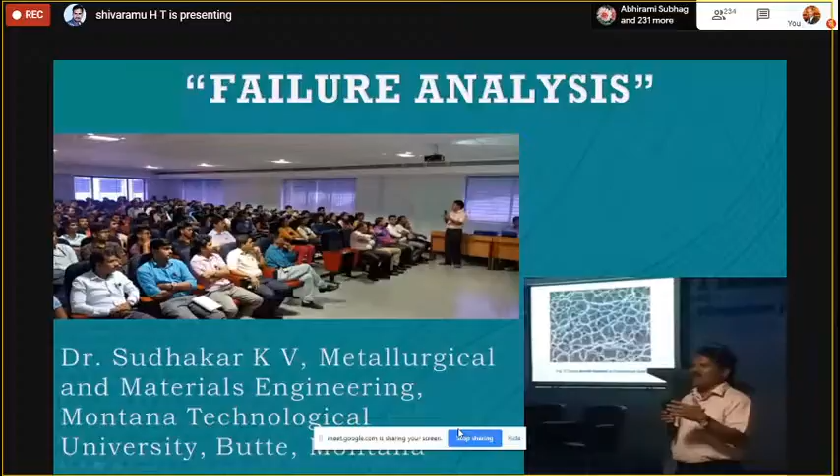Department of Mechanical Engineering organized technical talks for the benefit of students and faculty community. A technical talk on Industry 4.0 was organized on the 13th September 2019. Mr. Santosh MS, Senior Manager, Sales, IDAC India Private Limited was the resource person. On the 7th August 2019, a technical talk on failure analysis was organized. Dr. Sudhakar KV, Metallurgical and Materials Engineering, Montana Technological University, Montana was the resource person. On the 21st February 2020, a talk on use of modern tools in wire arc additive manufacturing was organized. Dr. Vijesh V, Associate Professor, Department of Mechanical Engineering, NMAMIT NITTE was the speaker.

A webinar on application of artificial intelligence to mechanical engineering and its allied engineering streams problems was delivered by Dr. Jai Bharti Simha, Chief Technical Officer, Director, Abiba Systems, Bangalore, India on the 8th July 2020. On the 25th June 2020, a webinar on semiconductors and their manufacturing process and usage in industry, an overview, was organized. Mr. Varun S. Gupta, Documentation Engineer, Akrite iTech Solution, Bangalore was the resource person.

Department of Mechanical Engineering organized career guidance talks for the benefit of students. A session on management of projects in a multidisciplinary environment was held on 20th August 2019. Our proud alumni, Mr. Vishal Vijay Kumar, Planning Engineer, Descon, ADNOC, Abu Dhabi was the resource person. On the 23rd September 2019, a talk on opportunities through GATE exam was organized. Mr. Anand Pai, Apex, Mangalore was the resource person. A talk on societal and environmental context and ethics of engineering practice was organized on 1st October 2019. Our distinguished alumni, Mr. Junaid Fiaz, Commission Engineer, Saudi Arabia, was invited as the speaker.

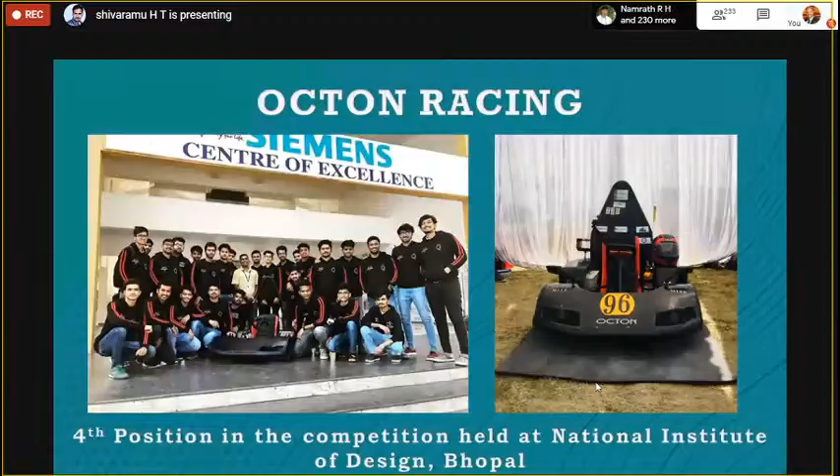The team Ultimas Racing participated in India Karting Race 2020 organized by ISIE India from 21st to 25th January 2020 at RPM Circuit Bhopal. The vehicle named Garuda V6.0 was awarded the Future Award and received a cash prize in the event. The team Nitrox Racing participated in SAE Baja India competition during 6th to 8th March 2020 at Chitkara University, Punjab. The team Octon Racing participated in the competition held at National Institute of Design, Bhopal, Madhya Pradesh, and stood at 4th position in the overall championship.

Department students won 6th prize in the state level project competition called Anvekshana 2020, a science and engineering fair with innovative projects to serve the society, for their innovative work on arecanut plucking machine. Our student has won first prize in the state level project competition Avishka 2020, sponsored by TechWipcell of VTU Belagavi, for their innovative work on medical emergency drone.

5 student projects were funded by Karnataka State Council for Science and Technology, KSCST, Government of Karnataka, and 2 student projects were funded by VTU for the academic year 2019-20. Our student has won the Best Project Award 2020 in the state level project competition conducted by KSCST, Government of Karnataka, for their innovative work on remote operated arecanut plucking and spraying machine.

Department students got placed in reputed companies like SLK Software, IBM, UL Technology Solutions Private Limited, TCS, Peterfox Media, QSpider, Alpha 9 Marine Services, Blackrock Technologies, Infosys, and Silver Peak, and many more. 4 papers were presented in global conferences by the department students. Our students actively participated in more than 30 events like paper presentation, quiz, sports, cultural, advanced vehicle building, etc., organized by various engineering colleges, university, and clubs.

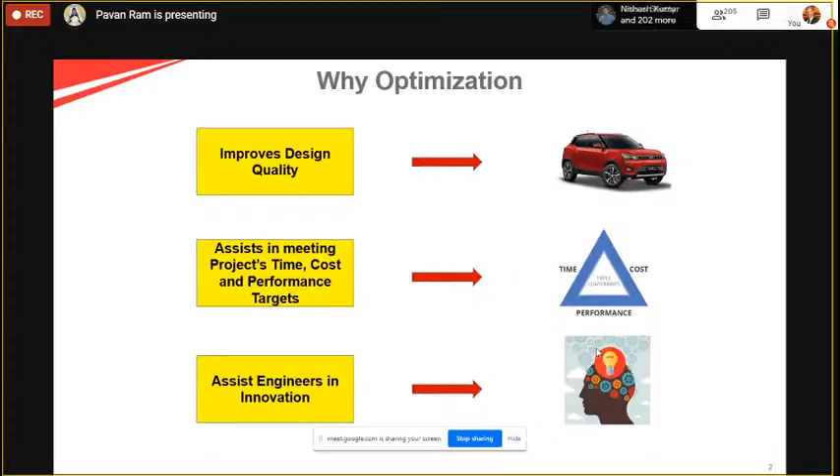And one more aspect, when the number of iterations or the jugaad or the way of taking decisions based on subjective means come down, then once the product is first time right, obviously you will have a lot of time. You can spend a lot of time in innovation instead of spending your time in iterating, right? So these MDO optimization tools will help give some time for engineers to innovate. So these are the 3 important things.

Now coming to what is optimization and what is MDO? Optimization is the process of obtaining the best result in a given situation, considering all the complex constraints which are there. Mathematically, I have an objective function. And this function can be a weight, can be a fuel economy, can be a combination of weight and fuel economy. This objective function can be range. So I either minimize or maximize, subjected to some constraints. What are these constraints? These are mathematical constraints, and these constraints can come up from various domains.

So when you're trying to design a vehicle, electric vehicle especially, you want the coefficient of drag to be very less. Then the losses are less and the range will be maximum. So there is a constraint coming from fluid dynamics. Then when the vehicle goes on road, rough terrain, a lot of road load, real world road loads will really damage your structure. Fatigue life is very critical. So your fatigue constraints will come, that your damage should be less than so and so value. My fatigue life should be so and so.

Constraints coming from durability. Then when you're designing an automotive, there are a lot of regulations on the crash, the occupant safety and pedestrian safety, which you need to capture in your design. You need to pass the regulatory requirements, at the same time make the occupant and pedestrian safe, which is very important. So some of the constraints come from crash simulations; crash is very important.

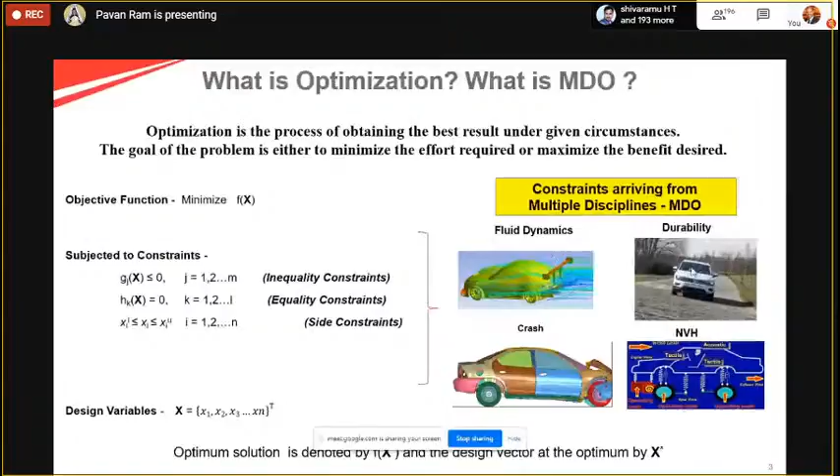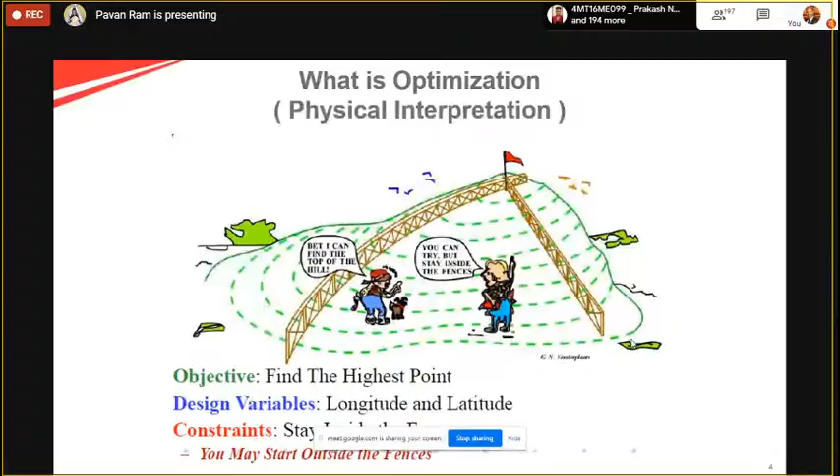But in an automotive optimization problem, you have fences coming from requirements from fluid dynamics, durability, crash, NVH, ergonomics, and so on. How do you meet all these constraints, minimize the weight of the vehicle, and come up with design variables like thicknesses, geometry, shape, topometry, material properties, and so on? That's it.

I hope I am audible to everyone. I'm just confirming. Yes, sir.

So how do you come up with a suspension system which gives drivability, comfort and lateral stability at the same time? Now, the HVAC system: if you want thermal comfort, you switch on the AC, with a lot of vents and airflow. But you need a compressor and a motor to drive the systems, so you have power consumption and a compromise on fuel consumption, because you have to burn some fuel to give comfort.

So how do you optimize your HVAC system, your vent locations, airflow, to give thermal comfort while minimizing fuel consumption? And in a typical car there is an A pillar, B pillar, and C pillar. If you are coming up with an electric vehicle design, your first objective is to reduce the drag. Why reduce the drag?

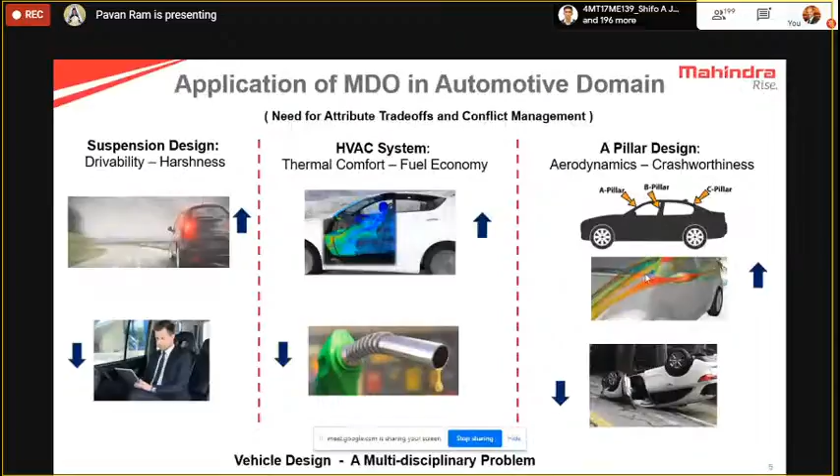During a rollover collision, the load transfer will not be good. There will be no crashworthiness. Or you will lose space inside the cabin, so ergonomically it may be an issue. Here I have shown only two conflicts, but there can be multiple conflicts. For example, in the third case, crash, aerodynamics, and ergonomics, there are three conflicts.

Now, durability and crash of the vehicle body. When you go on rough terrain, the thickness of the BIW structure and the rails should be very high, because the induced stresses should be less. But what happens when you design structures which are robust, very stiff? They will not be crashworthy. That means when there is a crash, they don't absorb the energy.

If you make a structure which is very durable, it will not absorb the energy during the collision, the entire energy comes to the occupant, and the occupant will have a severe injury. So you want structures which absorb energy, essentially thin structures. But the thin structure should not fail in a tough real-world situation. Now when you come to interior trim design.

So there is an A pillar here. When somebody is wearing a seat belt, let's say, but then there is no airbag deployment, right? There are some vehicles which don't have airbags. Then what happens during a collision? He will just move forward and there is a chance that he will hit the A pillar, right?

When he hits the A pillar, you can prevent the damage to the head by incorporating a foam kind of structure in the A pillar so that when there is a collision with the A pillar, the head impact is less, head injury criteria is met. But what happens, it occupies the space inside your cabin. So there is an ergonomics issue.

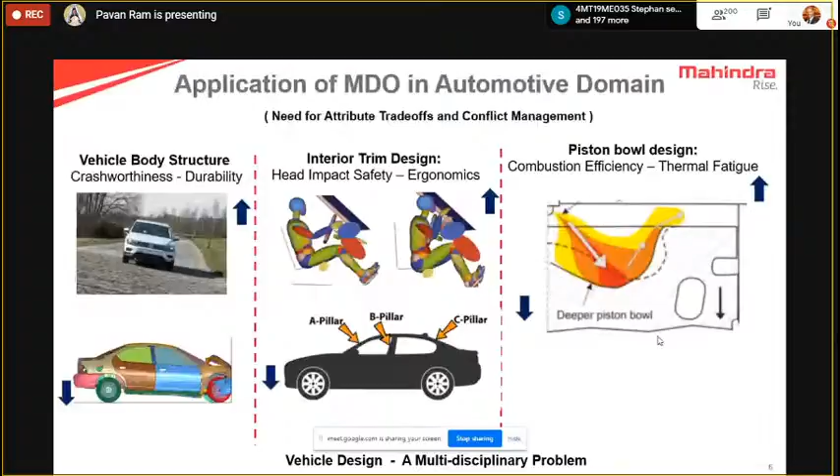So if you make a combustion bowl which is very efficient in mixing and very efficient in fuel economy, then you may get into problems in cracking the pistons, right? Thermal fatigue may happen. So both the durability team and the combustion efficiency team should work together and come up with this geometry which will meet both the requirements, right? So these are some of the trade-offs which typically in the automotive industry we encounter, and this trade-off list can go on and on, right?

Now you understood what is optimization, then you understood what is MDO, and then you understood the challenges in automotive, various trade-offs one should take when you're trying to take a decision, right? Now coming to lightweighting. Why are people talking about lightweighting, right? In the current technologies, IC engine powered vehicles, of course, when you reduce the weight of a vehicle from 1800 kg to 1500 kg, 300 kg weight reduction, let's say, fuel economy will improve, right?

One is fuel economy. Other is the material cost. Material cost comes down and it's very good, very profitable, right? Third one is emissions, right? For example, if you want to have an excess power engine, more power means, of course, more emissions, right? So for the same seating capacity, you can come up with a less powerful engine for the same acceleration performance and seating capacity on the same platform, if the weight of the vehicle is less. So in that way, emissions also will improve.

Now coming to the next generation, right? Electric, autonomous and connected. And people are struggling today in EV platforms. The only thing is the battery technology, the range which we are looking at, because in city drive, lot of traffic, lot of clutch operation in an IC engine powered vehicle, right, lot of deceleration, acceleration, because of the huge city traffic.

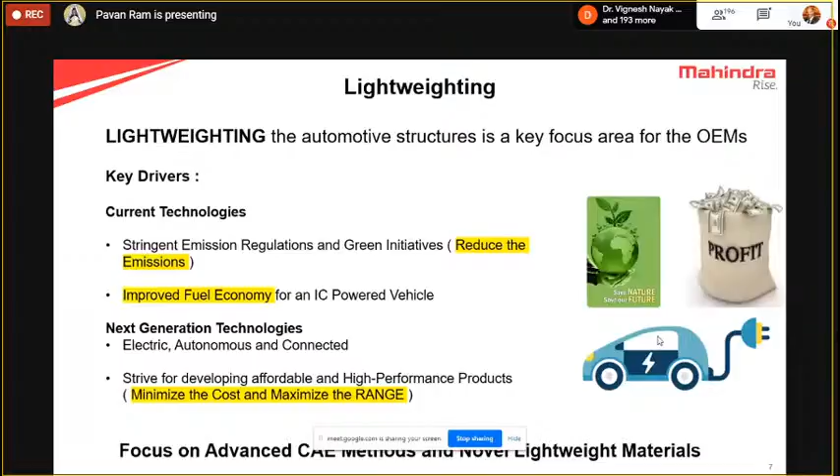Now that you know what MDO is, the challenges in MDO and why lightweighting. Lightweighting is very important, right? Now let me tell you, what are those challenges in MDO?

When somebody wants to start MDO, he should at least understand the various challenges in the entire automotive space. He should know NVH, durability, crash, vehicle dynamics, ergonomics. He should know fit and finish, GD&T. He should know mechanisms, understand transmission, the entire subsystems and the challenges in the subsystems. So when you're trying to formulate the MDO problem itself, you should have practitioner's knowledge of all subsystems.

So that's one challenge. Let's say you know the challenges and you could formulate the problem. Now, when you want to run this MDO problem, you need to know, or at least work with people who know, various solvers, because there is no single solver. Some solvers are very good in CFD, some in vehicle dynamics, some in crash, some in contact mechanics, some in combustion, some in electromagnetic physics. So this is a very multi-physics problem. There are very few softwares which have all these capabilities. Some are good in some.

So how can an engineer get expertise in all these areas, at least to speak with the experts in those softwares, and integrate all these softwares to run an optimization problem?

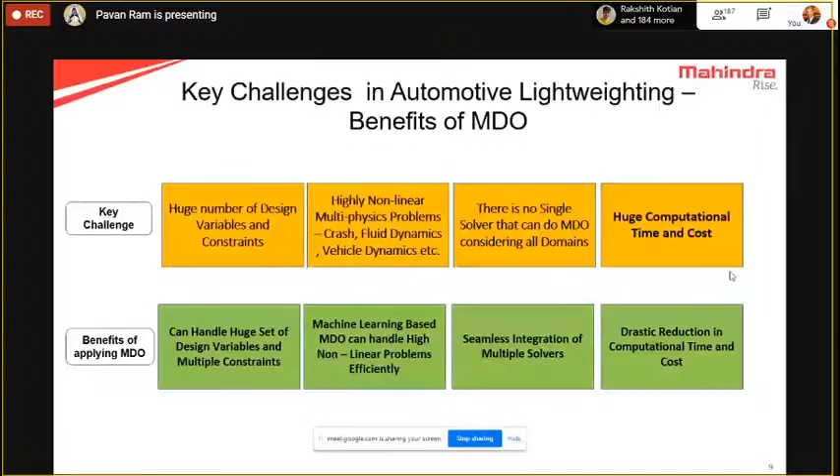Now coming to lightweighting. You can lightweight by multiple means: materials, joining techniques, downsizing the engine, lightweighting the powertrain, and many other ways. But what I'm talking about in the next few slides is lightweighting using design optimization, by size optimization, shape optimization, geometric optimization. You can pick any of these techniques based on feasibility and your technology roadmap. But in this talk, I'm talking about design optimization through geometric and shape optimization.

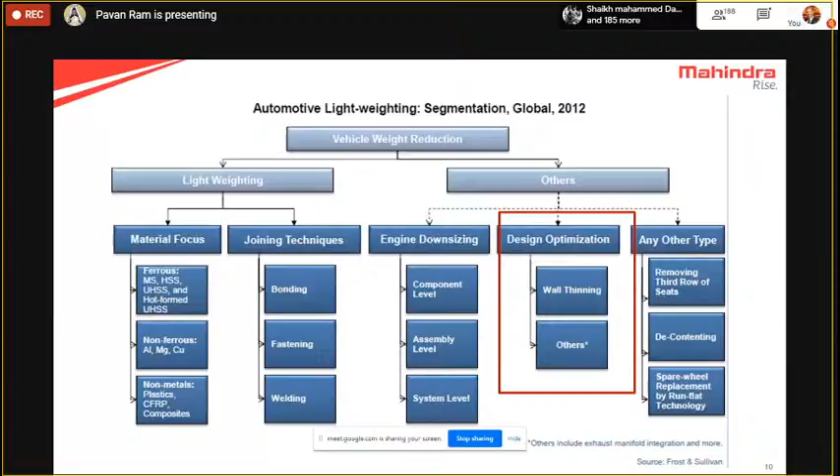So let me take an example of an automotive lightweighting problem. Let's say there is a mass of the vehicle you have to reduce and there are thickness variables, right? For simplicity, I have shown only three variables, but in the next slide I will show some of the complex problems.

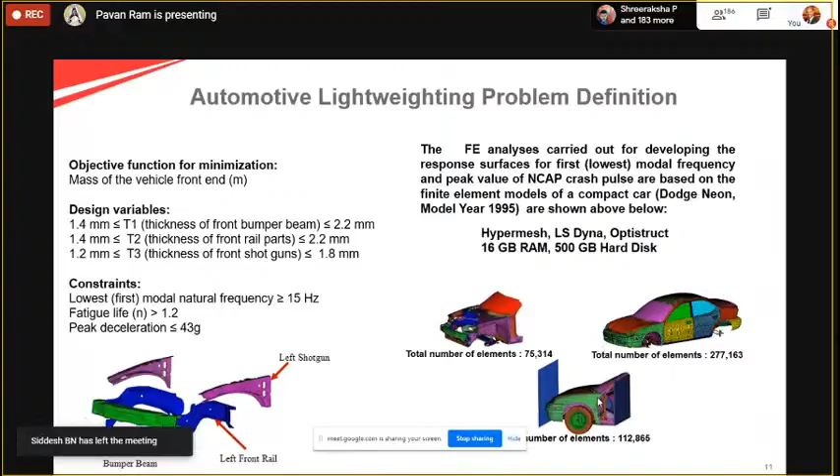Then after rejoining Mahindra, we came up with the hybrid MDO, which considers this practical MDO plus an equivalent static load method. And this gives a very significant reduction in time to run the full vehicle analysis. Then I'll also talk about data science and MDO, which is creating disruption in MDO.

Due to time constraints, I don't want to get into more details of response surface method based MDO and practical MDO. But one thing I can tell: in response surface method MDO, let's say there are 30 DOE points. I think all of you understand design of experiments. There are 3 experiments in this case, NVH, durability, and crash. You need to run all 3 analyses at all these 30 design points when you are doing the response surface method.

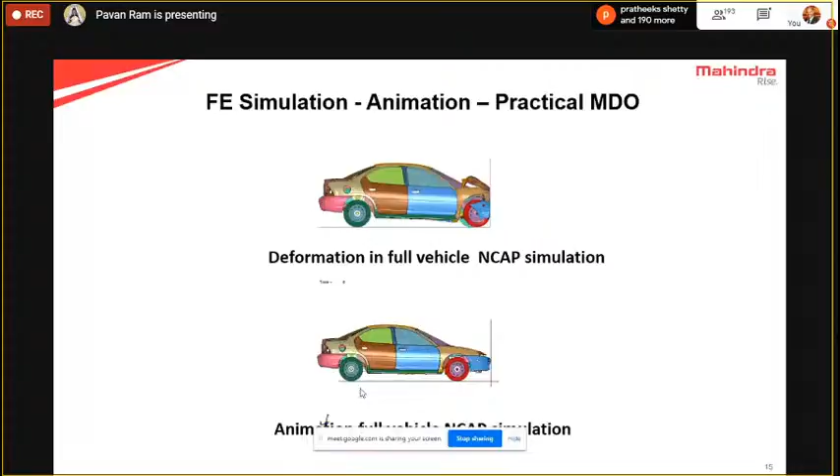But when you are doing practical MDO, there is no need for you to generate a response surface. So I'll discuss how it works. This is the simulation model, and this is practical MDO. I'll not get into details, but let me precisely tell what happens in practical MDO with respect to RSM MDO.

In practical MDO, we come up with 175 design cases. First, we quickly run the NVH constraints. NVH, noise vibration, is a very linear phenomenon, so linear analysis will not take much time, and 107 cases are meeting the NVH constraint. Now you pick these 107 cases, order them by minimum weight, and start running the durability analysis. If it meets durability, then you run the crash analysis, only for those cases meeting durability and NVH.

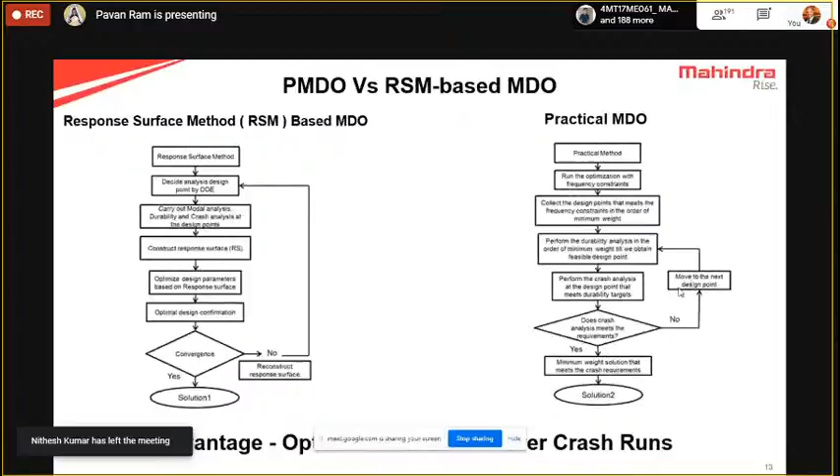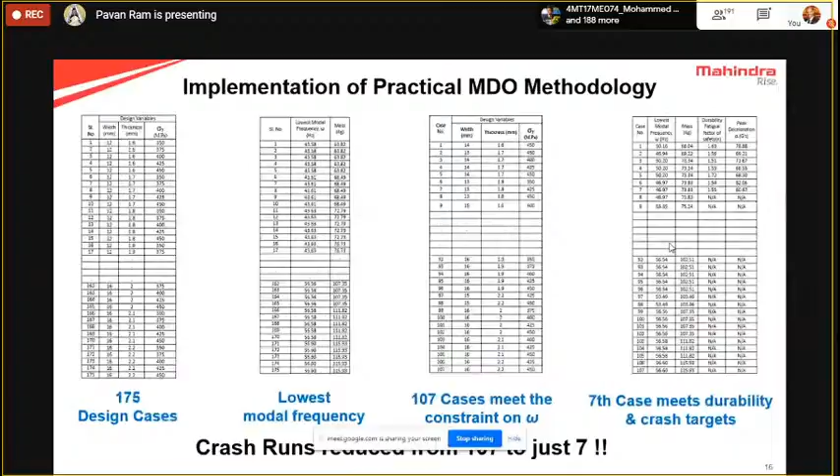So you will run the crash analysis only for 7 cases. But in an RSM-based method, you have to run the crash analysis for all the design points. If you have 150 DOE points, you have to run 150 crash analyses. And remember, crash analysis is multi-fold time consuming. So practical MDO is a very efficient way of minimizing the crash runs.

In this plot you can see the RSM-based method takes 62 hours and practical MDO takes only 14 hours. And the solution accuracy is very close: RSM gives 15 kg and practical MDO 16 kg reduction in those 3 components. So without compromising on accuracy, you have a very drastic reduction in time with practical MDO.

Now let me quickly get into the third one, hybrid MDO, where you use practical MDO and the equivalent static load method. This is a specialization by itself, so I'll quickly try to explain. In the equivalent static load method, you convert the nonlinear problem into a linear problem. You find the equivalent static loads which give the same deformation.

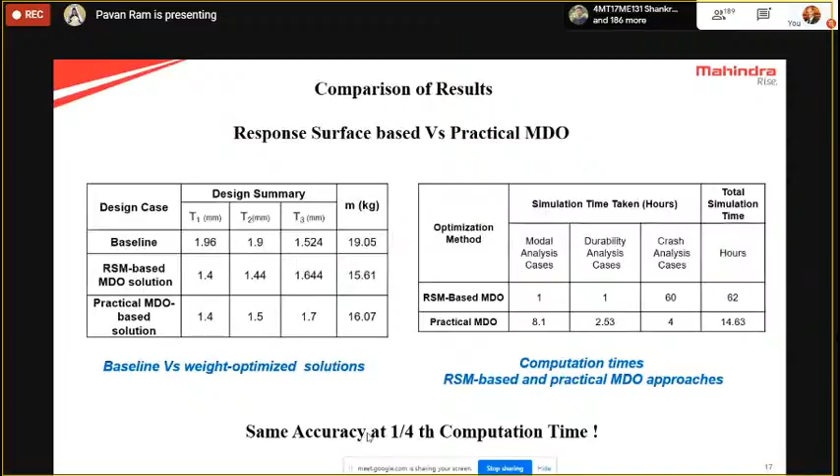And then what you do is, you do the optimization in linear space and then map your solution to nonlinear. So in this way, your solution computational time will become 1/8 with the same accuracy. So if you see, your solution time drastically reduced with practical, it became 1/4. Then it became 1/8 with the ESL-based method, right? Now I'll show how a machine learning-based method can do miracle.

Okay, so without getting into the details of machine learning method, before that, let me tell you what is the importance of reducing this time. I'm talking about 1/4 reduction in time, 1/8 reduction in time. Why you should worry about time, right? Because we know that competitors are coming up with various models, right? And they release the models every 6 months.

So when you talk about new product development or a new platform development, we don't have time to run simulations for months together. Full vehicle simulations, crash simulations, we don't have time. We want to come up with frugal methods, quick methods without compromising on accuracy and coming up with the decisions, which can decide beam-based modeling, machine learning-based modeling, which we'll do in days' time, right? That's the story. So to get into that, you should come up with these innovative CAE methodologies.

So now our last method here in this lecture would be machine learning-based MDO. How it is different from the earlier 3. So of course the benefits from earlier 3 are carried over. That means you have a practical MDO, you have an equivalent static load method. Along with that, if you also use machine learning-based method, how it will work, right? So let's say these are the thicknesses, you have multiple thicknesses, you have constraints.

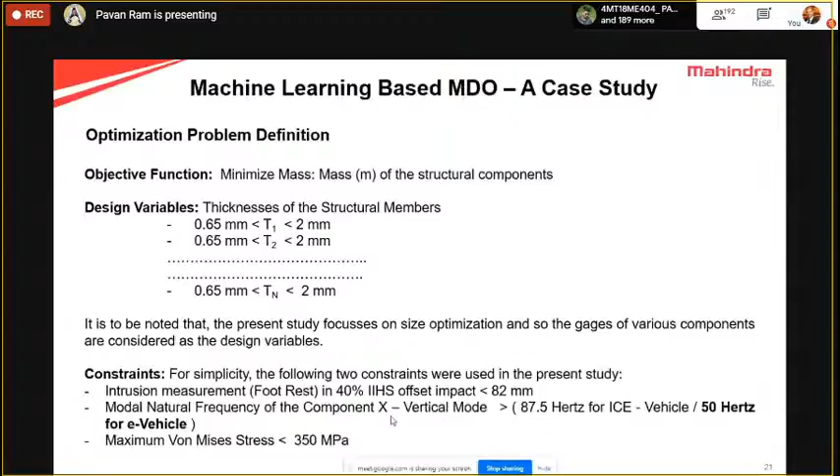So what happens is your natural frequencies, your NVH targets will change when you go from an IC engine power to EV power. So what we typically do is we run some experiments, right? How do we run some experiments, right? So we mount some accelerometers and microphones at 3 locations. One is at the motor, one is at the co-driver's seat, one is at the rear seat. We mount, these are the microphones.

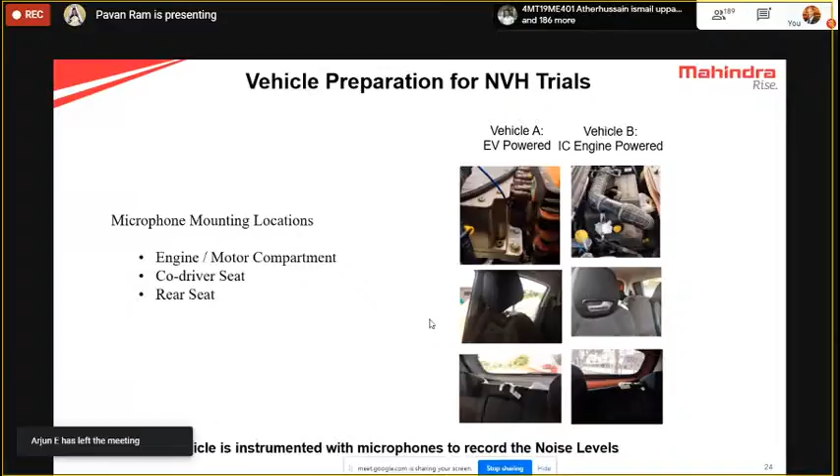And you also mount the accelerometers. Why do you mount the accelerometers? To get the G levels. So accelerometers, and you also mount the microphone. So once you do this, you will compare. So the green color is an electric vehicle and the blue color is an IC engine vehicle, the histograms you see, right? At 20 kilometers per hour, we start the vehicle.

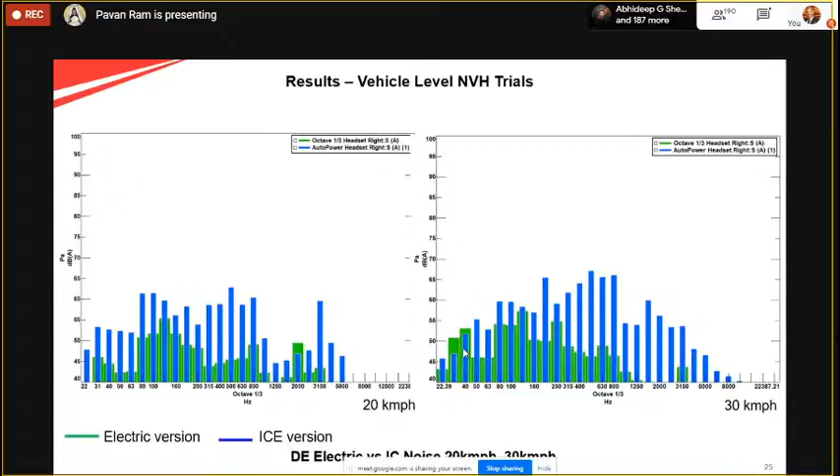2 vehicles we have. One is the IC engine vehicle and the other is the EV vehicle. EV vehicle is the converted version from IC to EV, right? A first prototype. Once we make the first prototype, we run at 20 kilometers per hour. We compare the noise levels at these 3 locations at different speeds, 20 kilometers per hour, 30 kilometers per hour, 60 kilometers per hour, 70 kilometers per hour, right?

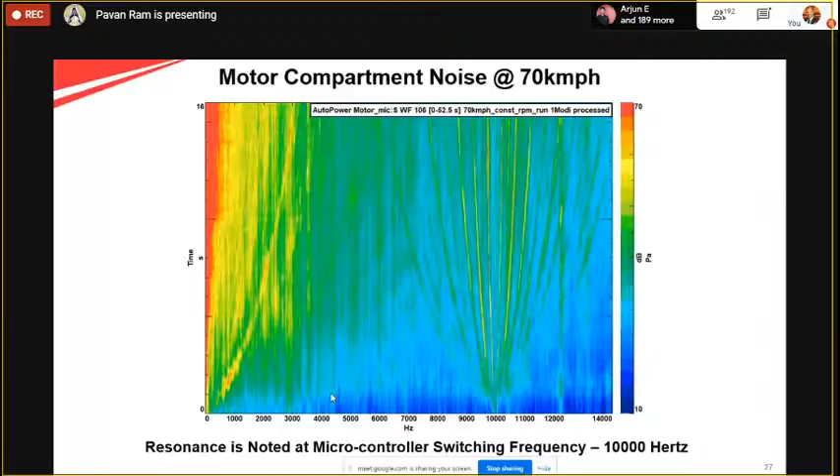Now, well below 5000 hertz, there are a lot of other resonating frequencies like the rotating components in a motor, right? Cogging torque is there. That's another exciting force, right? So there are multiple excitation frequencies which come in and which will cause the resonance. So an engineer has to get into details of this and then come up with those sources, either reduce the source of vibration or improve your structural design so that noise and vibration are not transferred to the occupant compartment, right?

So now this is one of the last slides in this analysis of electric vehicles. If you see, there is an option for us to increase the noise levels in an EV powered vehicle, right? Because consistently at all speeds we saw the noise levels in the EV powered vehicle are less and the noise levels in the IC engine powered vehicle are more. It is very obvious, right? Now, can we increase the noise levels in the EV powered vehicle? What will be the benefit if you try to increase the noise levels?

I can reduce the stiffness of my structure, right? At a particular frequency, I can reduce the noise level. I can play with the stiffness of the structure. I can reduce the stiffness of the structure. What happens when you reduce the stiffness of the structure? It will vibrate, right? It will be noisy. I don't have any problem.

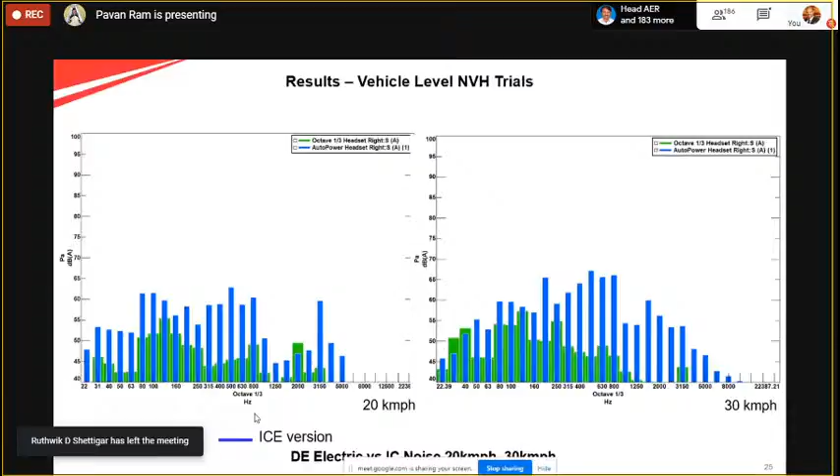I can reduce the stiffness of the structure for an EV powered vehicle because the EV powered vehicle noise levels are very less. Can I leverage that delta and then come up with a reduced stiffness structure, right? Which will save the cost and which will give a lightweight solution. This is one thing. So what I try to show you here is a lot of experiments will be done to come up with the constraints. These constraints will go in the optimization problem, in this modal natural frequency constraint. This 50 hertz I'm talking about for an EV is coming from those experiments. So we do a lot of experiments to come up with the constraints, right?

And then we run the NVH analysis, crash analysis, accelerated durability test at 200 points. We come up with the predictive models. Now, if I halt here, see how many design variables are there? 48 design variables, thicknesses. And how many responses? 15 responses in NVH. In crash analysis, 14 critical design variables, and 9 responses. In durability analysis, there are 26 components which are critical from a durability damage perspective, and there are 25 responses, right? These responses are nothing but the stress induced.

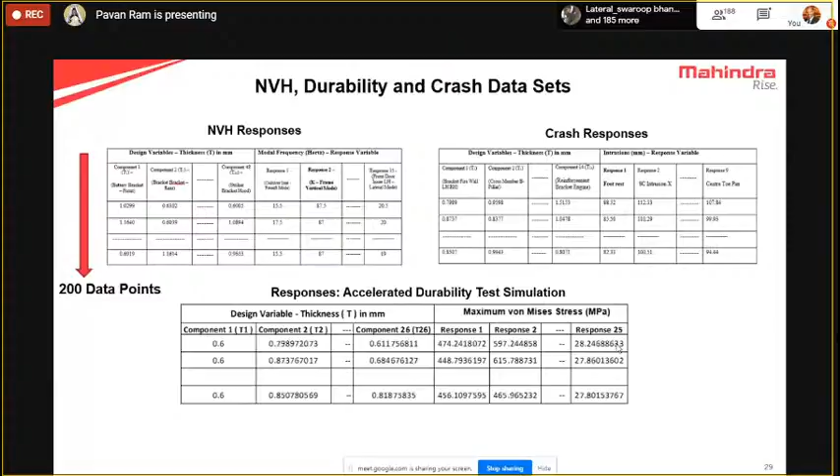How can you come up with a predictive model? So if you see in the screen, these are the components which are very sensitive to NVH, durability and crash, all 3 domains. Because finally we should focus on those components which are sensitive to all 3 domains. Why? Because if you change one, the other can violate. So these are the components which are sensitive to all three, looking at the results. Then you develop machine learning based predictive models, and these predictive models will go into an optimization algorithm.

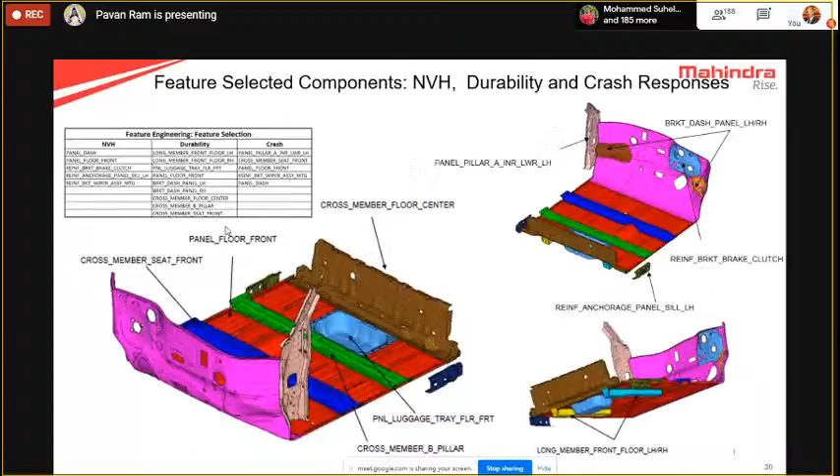And once you run the optimization algorithm, the thickness of these components can be reduced. Baseline is 0.8, optimal is 0.6. Now you see 20% reduction in the mass of the structural components, right? More than 20% weight reduction potential for an EV version because you are reducing the stiffness of the structure. So essentially you are capturing NVH, durability, crash, you came up with the solution runs, the components which are critical for all three domains, and then you run the optimization algorithm and came up with an optimal solution. So this is how you will do an optimization in an industry kind of scenario.

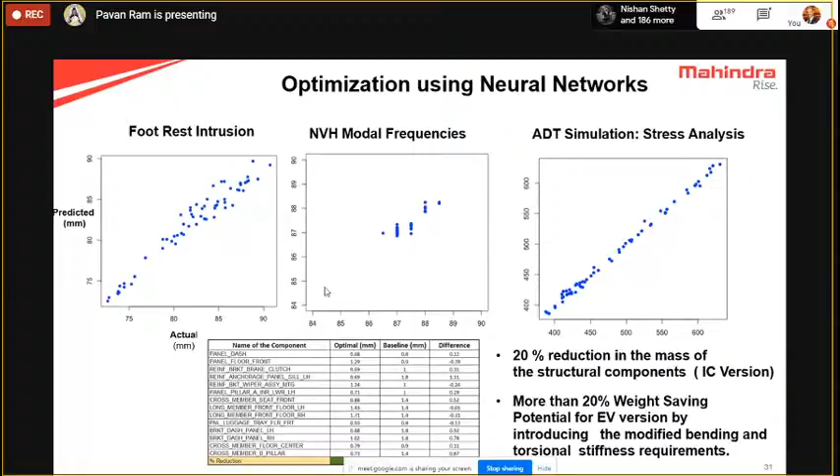The 20% weight reduction is a very significant weight reduction, right? And it will contribute to a significant increase in the range of an electric vehicle. Now, the last 2-3 minutes I will spend, and then I am done with the talk, on something which is very important for all mechanical engineers.

Going forward, all mechanical engineers should get into data science, machine learning, IoT and cloud, right? Electronics, embedded systems, so on and so forth. Software programming, Python programming. You have to learn advanced skills. Why should you learn advanced skills? Because when you apply the machine learning based technologies, I'm showing a few: forward feature selection and clustering. When you use these technologies, you see the magic. When you do the optimization with 200 design variables, 200 data points and 14 design variables, if you apply these two techniques, with just 5 data points and 3 design variables, you can get the optimal solution.

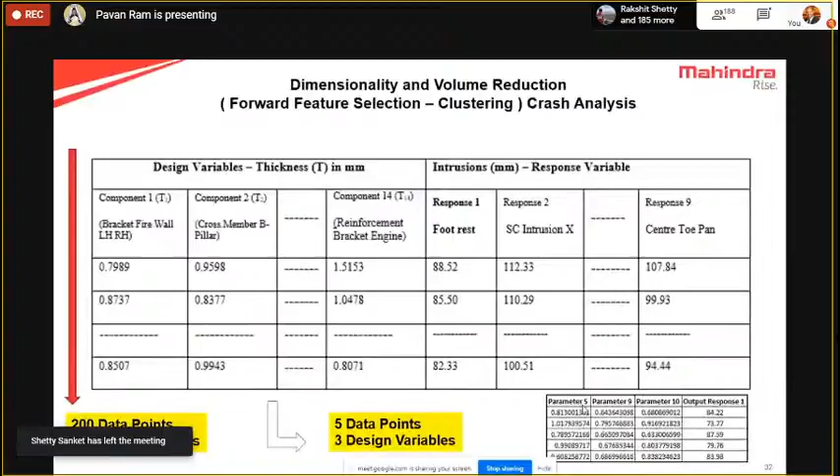If you apply those machine learning techniques, I am repeating, instead of 200 data points, you need only 5 data points. Instead of 14 variables, you can just come up with 3 design variables, which are critical for this response. Essentially, what I am trying to say is, when you are trying to identify this response, earlier a traditional engineer will generate 200 data points and work on 14 design parameters for this response.

A machine learning person who also is a hardcore domain expert in MDO will only look at these 5 DOE points and these 3 parameters for this response because the statistics is showing. Statistics shows that with 85% accuracy, if you use the clustering method, this is error, 15% error means 85% accuracy with 6 clusters, you can reduce 200 DOEs to 5 and 14 design variables to 3. And this is actual versus predicted.

So essentially what it translates, once again I am telling, industry is worried about time, cost and performance, nothing else. Essentially what it turns out, 133 days of solution time is coming to only 3.3 days of solution time when you use dimensionality and volume reduction techniques. So see the disruption, how data science and other algorithms will help you in your domain, solving your domain problems and reducing time. Obviously, when you reduce the time, the computational space is also reducing.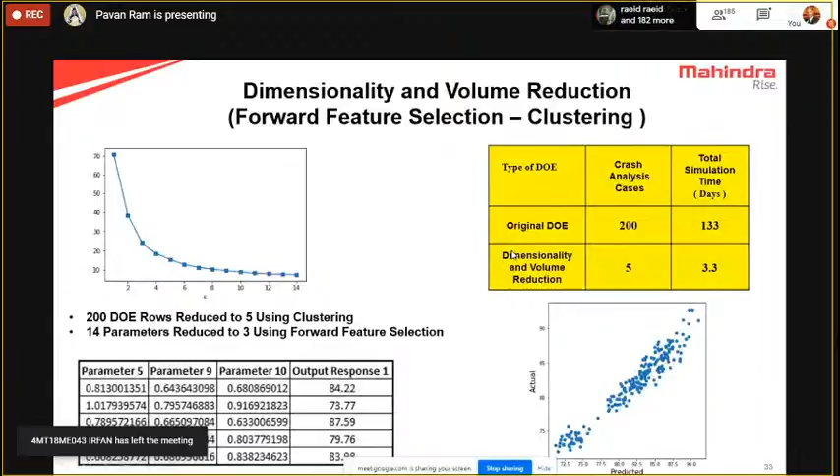So with this, I will conclude with a systematic methodology. I have shown you what is optimization, what is MDO, what are the challenges in automotive optimization, what are the various trade-offs or conflicts one has to do, and then what is the importance of lightweighting and what are the various ways one can do lightweighting. And for lightweighting in design optimization, I took an example and showed how we can apply various algorithms like response surface, practical MDO, hybrid MDO, and then machine learning based MDO to come up with a 20% reduction in vehicle weight, which will have considerable improvement in the range, right? So with this, I would like to end my presentation, and thanks a lot.